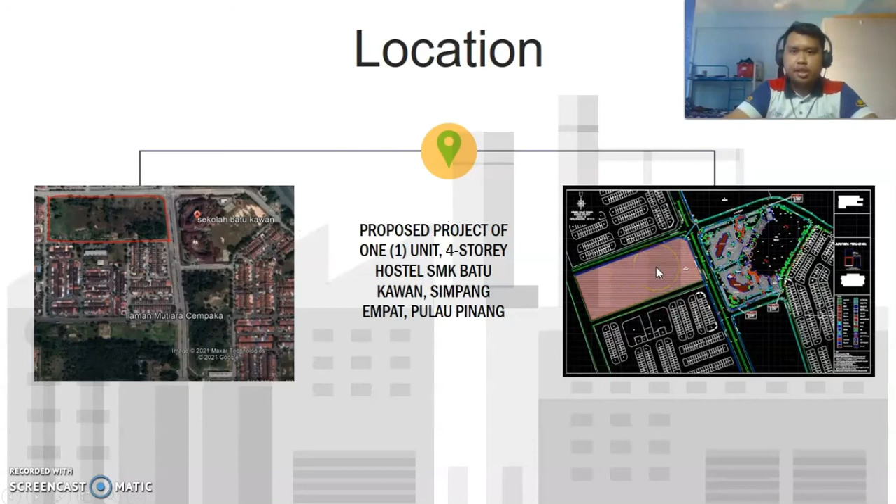So this is the location for our project, which is located at Jawi, Pulau Pinang. The population at Jawi is I think 10,000 people, mostly a Muslim population. So this is the area for SMK Batu Kawan from Google Earth, and this is a drawing for the proposed site for this project.

So this is a timeline for the infrastructure work, which is we start with the earthwork, and then after that we go to the road and the drainage system, and then to the sewerage system. Next, going to the water reticulation system, and lastly is the landscape.

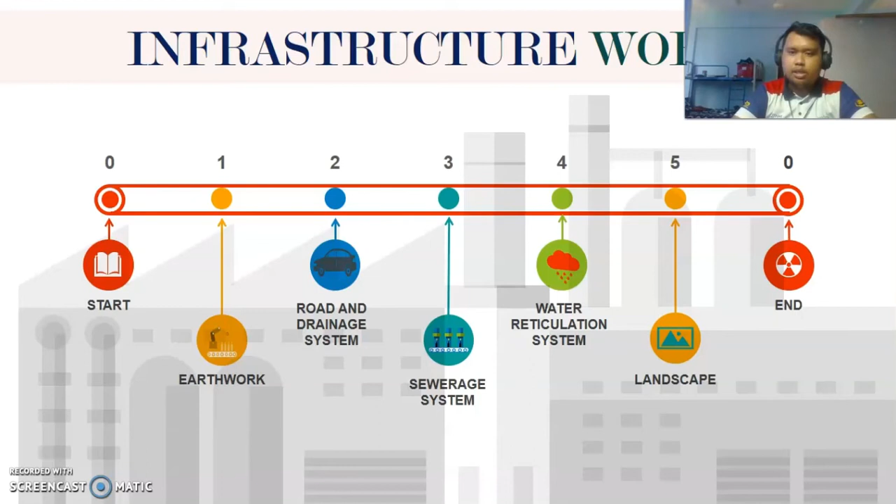And so earthwork, what is earthwork? So earthwork is a process whereby the surface of the earth is excavated and transported to and compacted at another location. Actually for the earthwork process, there are several things we need to do, such as site clearing, cut and fill, silt trap, topsoil stripping, and others.

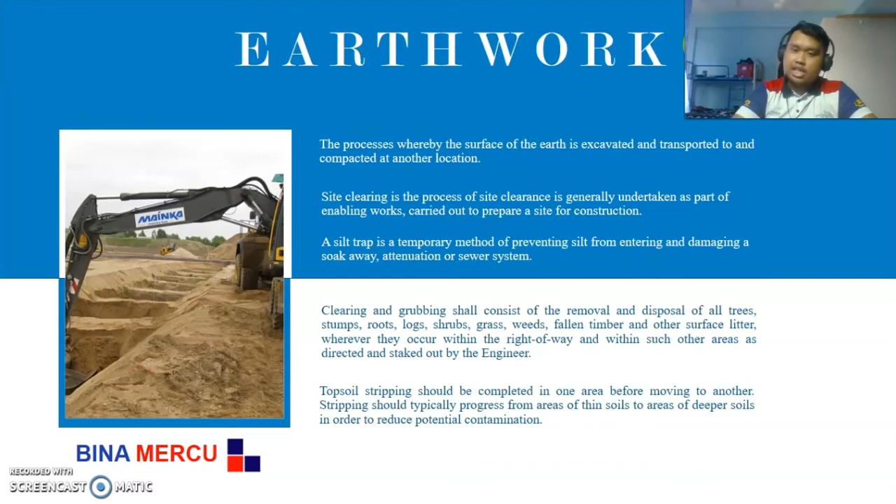So for this earthwork process, we need to make sure all the processes are in good condition. Topsoil stripping should be completed in one area before moving to another. Stripping should typically progress from areas of thin soil to areas of deeper soil in order to reduce potential contamination. So this is the earthwork.

Next is the road and the drainage system. The road and the drainage system have six processes. The first is to receive the survey and project layout drawing by the architect or client. Next is to estimate the ground level from the survey drawing for road and drainage design. Next is to design the flexible pavement with the JKR standard guideline. For the JKR standard we use the ATJ, Arahan Teknik Jalan.

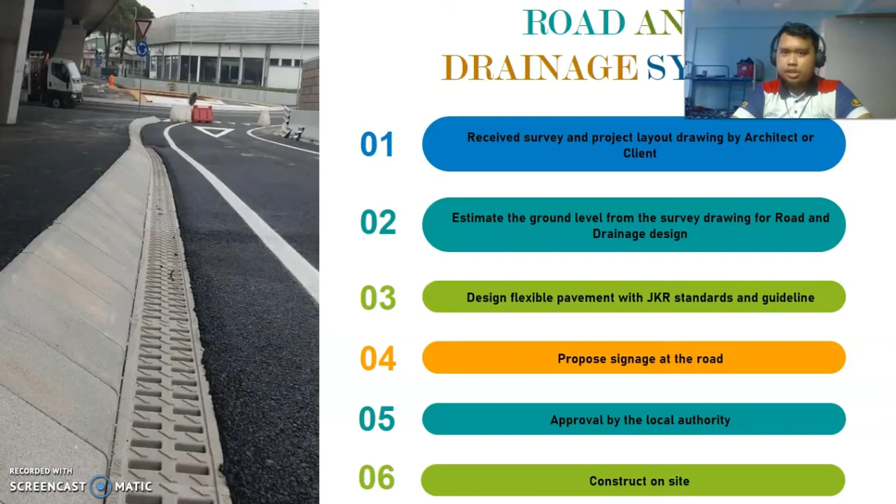Next is propose signage at the road, which means we need to propose the signage. And next is approval by the local authority. For your information, the local authority for this proposed project is Majlis Perbandaran Seberang Perai, MPSP. And next is to construct on site.

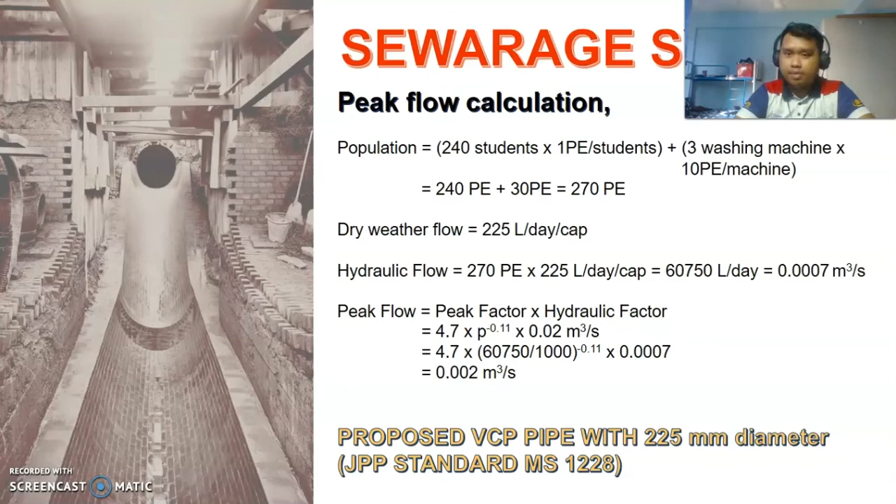So next, we're going to the sewerage system. The sewerage system needs a calculation so we know how much capacity we need for the sewerage system. So this is the calculation. We're going to use the JPP standard MS 1228. Our proposed drainage is a VCP pipe with a 225 millimeter diameter. So this is the Manning formula.

So from this, the 225 millimeter VCP pipe is suitable and safe to be used, as the pipe capacity is more than the peak flow, fulfilling the requirement of the JPP standard MS 1228.

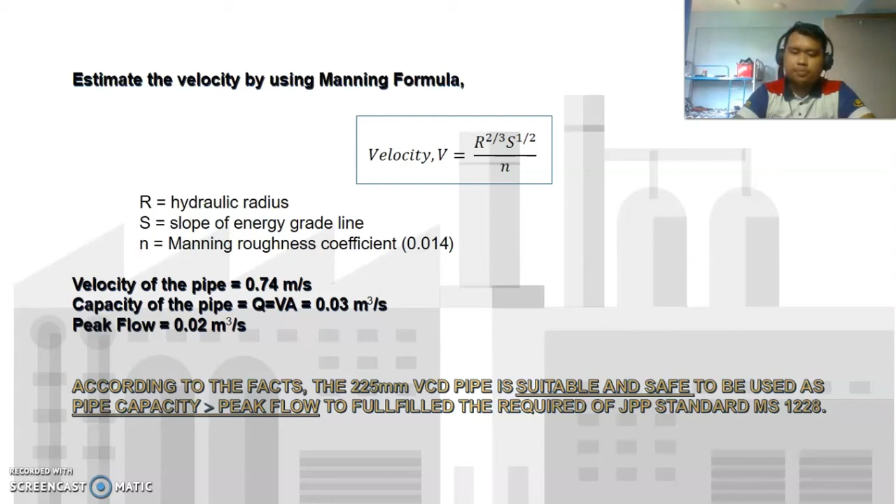So this is the water reticulation system. In general, what is the water reticulation system? A water reticulation system assists water to move from the source to the consumer. The volume of water required is another factor when arranging and planning the system. So what are the activities in the water reticulation system? We have four activities.

First is setting out, where all setting out of the pipe laying work shall be performed by the contractor's surveyor. Next is the excavation. Before commencing the excavation of the pipe trench, the route of the pipeline shall be pegged out accurately.

Next, pipe work. Pipe work is the most important activity, which covers handling, laying, and testing the pipeline. It shall comply with the latest technical specification from SPAN, the Suruhanjaya Perkhidmatan Air Negara, or other relevant standards, and also the manufacturer requirements. We use SPAN, PBA, Perbadanan Bekalan Air Pulau Pinang, and others.

Next, the external water storage tank. The contractor should supply a new tank reservoir from a manufacturer specializing in the design, fabrication and erection of the approved water storage tank. So these are all the activities of the water reticulation system.

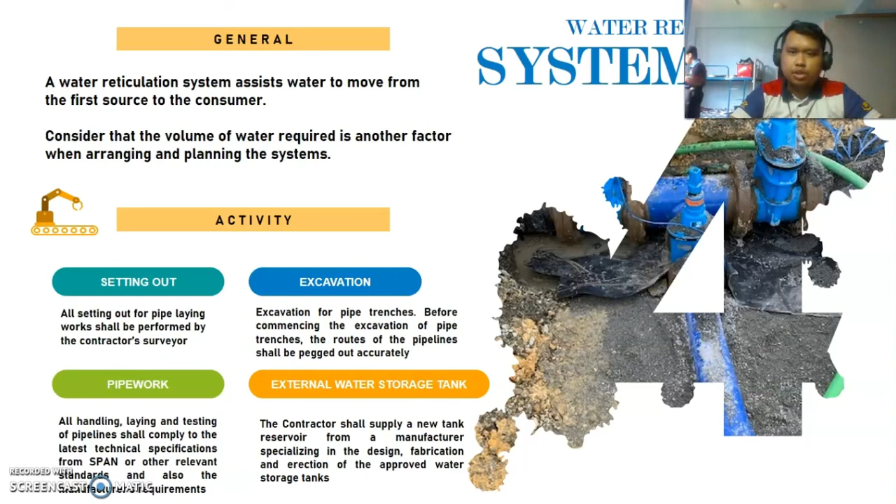Lastly is the landscape. What is a suitable landscape for our project? A suitable landscape is designed to be both interactive and in balance with the local climate and environment, and should require minimal resource input. To design a suitable landscape, it must be functional, cost efficient, environmentally friendly and maintainable.

So this is our proposed suitable landscape. First is the cherry blossom tree. Next is the decorative tree, artificial grass carpet, and lastly common usable grass. This is our proposal for the landscape in this project.